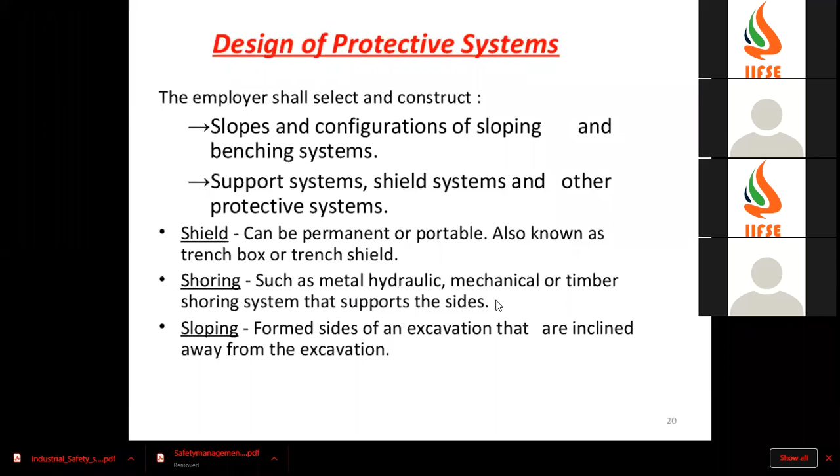Shoring - I'll show you in future slides. Shoring and sloping. Shoring is a metal shoring such as metal, hydraulic, mechanical, or timber shoring systems that supports the sides. We discussed earlier that there will be adjacent sides with wood supported by either mechanical or hydraulic systems. We've seen hydraulic pneumatic systems - the absorbers will increase or decrease based on the excavation width.

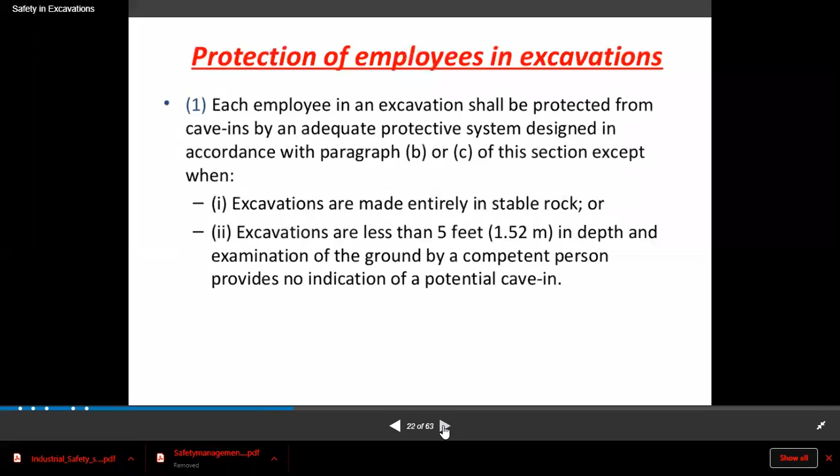So sloping - form sides of excavation that are inclined away from the excavation. Inclined means sloping, and there is also benching. There is a slope which is inclined 45 degrees away from the excavation. This is a simple side.

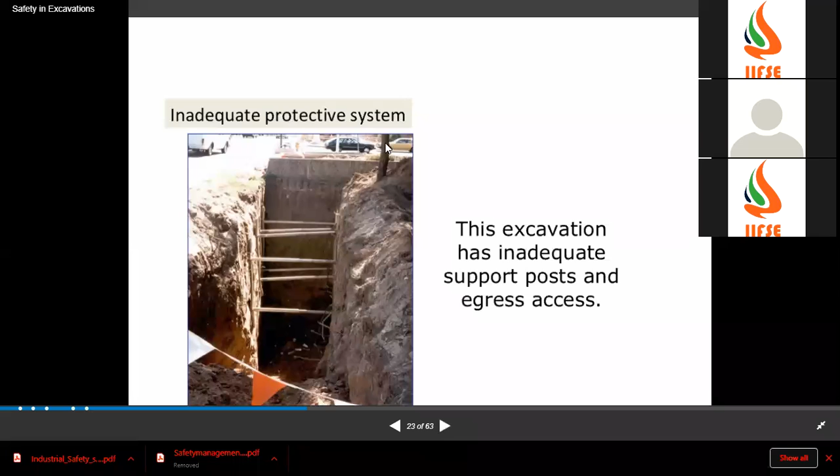Just a minute. I would like to have a look at real-time pictures. This is an inadequate protection system. See, the excavation is not proper, the protection system is not proper. And you can see one tree adjacent to the excavation part - it can fall also. This is how an inadequate protection system looks.

They don't have ladders. If you place a ladder on the excavation part, it should project 3 feet or 1 meter high from the edge - that is the standard. The worker also, in the trench, they have dumped excavated soil nearby this - that is also a very dangerous scenario, an overburden condition. It's a very unsafe and dangerous condition, right?

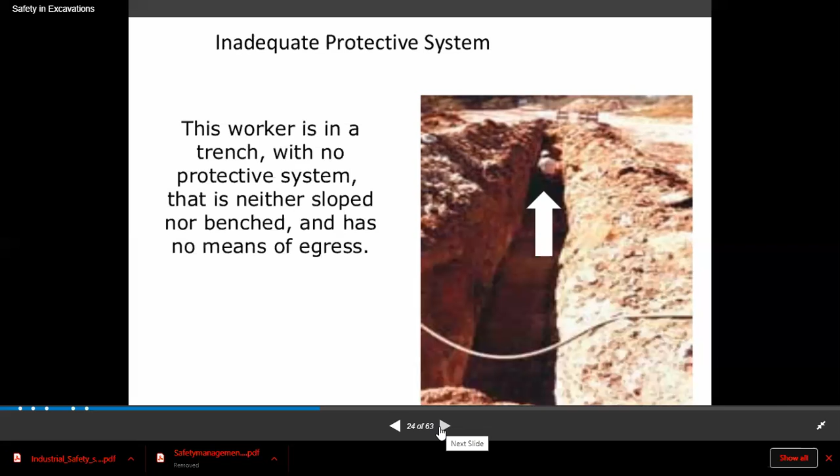The soil should not be placed adjacent to the excavated area. There is no shoring, there is nothing, no protective system - either sloping, shoring, or benching. So what is this?

We are talking about soil classification, factors - this is an important slide. What are the factors involved in designing a protective system?

What are the factors it depends on? If we need to design a protective system to protect an excavation and take safety precautions, on what circumstances does it depend? What factors are based on - if you want to choose shoring, benching or something, on what basis will you choose that?

It depends upon the soil classification - Type A, type B, type C soils will be there. It depends upon soil classification, and the depth of the cut - how deep it is. If the depth of the cut is too deep, they'll place more trench boxes, or if the depth of the cut is too deep, they'll use shoring techniques.

Water content of the soil - why water content of the soil? It determines the stability of the soil. What happens if the water content is more or less? If the water content is less, the soil will be loose. Why does sliding happen? Landslides - when the water content of the soil is more, the slides happen.

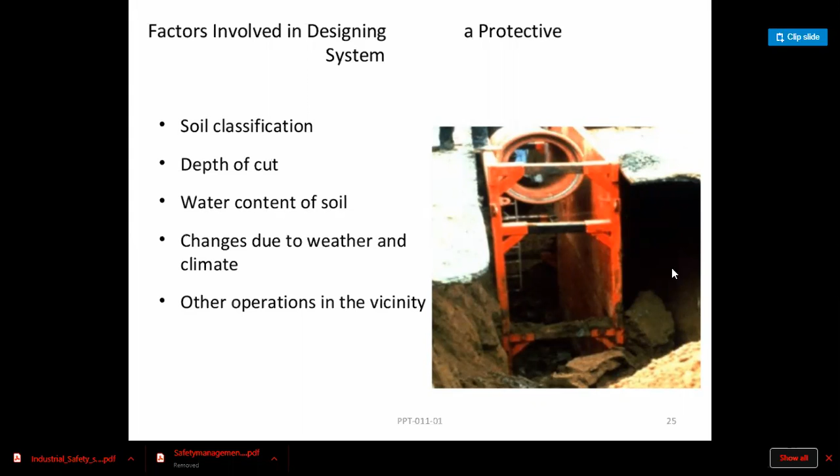First thing is sloping - just forming a slope beside the adjacent sides. Shoring means keeping wooden boxes or sheets and supporting those sheets with different kinds of means - it can be wooden, hydraulic, or mechanical.

Shielding means a trench box. Use walls, cross braces, and uprights. Supported excavation walls must account for soil type and width of the excavation.

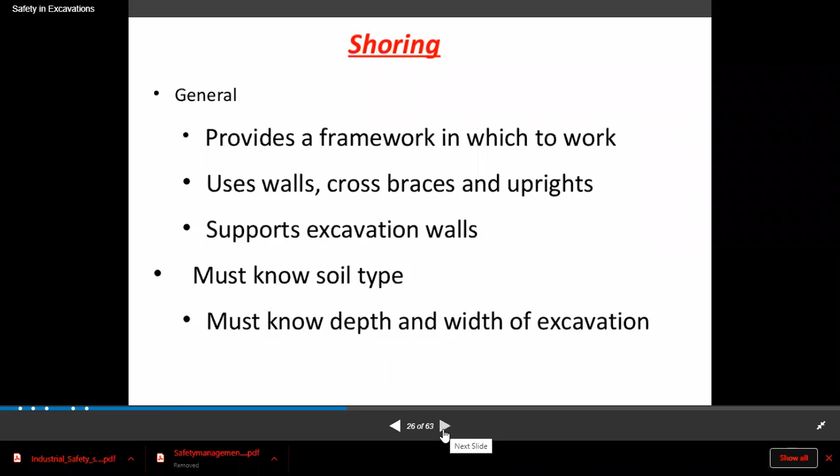So this is the trench box - the shield. What is he doing? There are pipes running, and he is working in between the pipes.

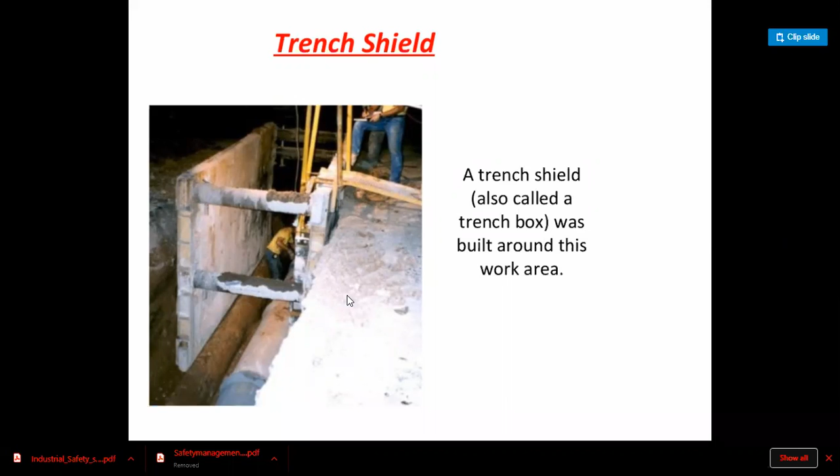Access and egress also should be considered. Always when a person is going into a trench, access and egress should be proper. Here he doesn't have proper access and egress - well, he has something to catch here, right? So the ladder should be extended further, or this kind of provision should be provided.

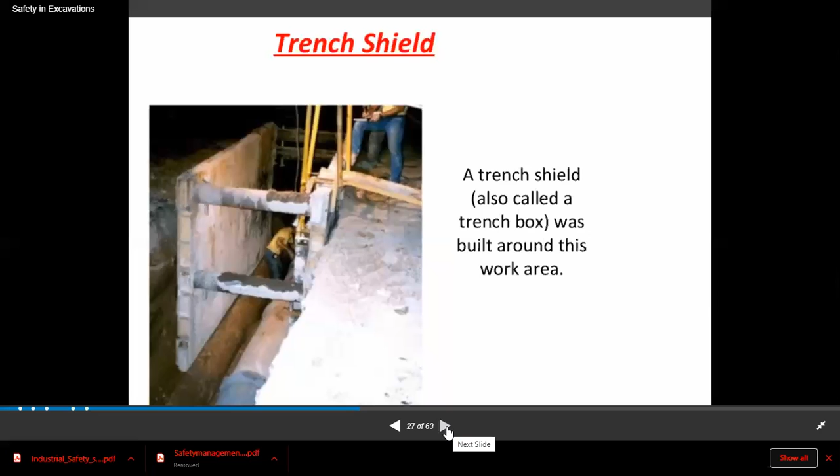It has a provision of grip. Normally the ladder should be 3 feet or 1 meter high from the edge. See, this is hydraulic trench support - you can see it very clearly. These are the hydraulics, this pipe is the hydraulic pipe in which he can adjust the trench support.

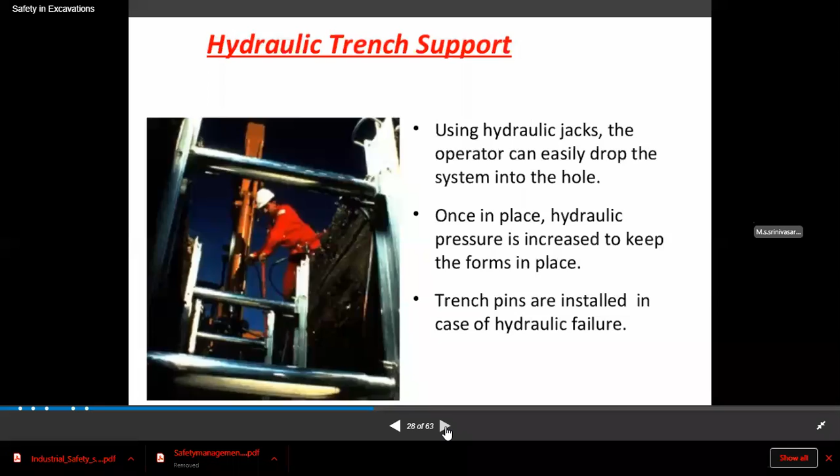The person who is overreaching also is having proper PPE. This is a trench box, but it is used appropriately. Materials and equipment - see, this is what happens if there are no barricades.

So if you have a question like, in what way do you protect vehicles from excavation areas - how will you protect the vehicles? You will install barricades, hand mechanical signals, and stop logs.

Stop logs are something like caution boards - yes, caution boards come under caution boards, signage boards, informative boards, caution boards, and safety boards. Normally, as per our government standards, information boards will be square type and blue color. Traffic boards will be red color, and there are some other colors.

Stop logs means you have to keep one wooden cubicle form. It indicates yellow and black, right? Signage boards indicate - what, sir? Signage boards contain two colors, that is yellow and black.

So there are three types of boards - informative, cautionary, and signage. Different types of boards, and if you're on the road, you can see the colors - some boards will be blue, some boards will be yellow.

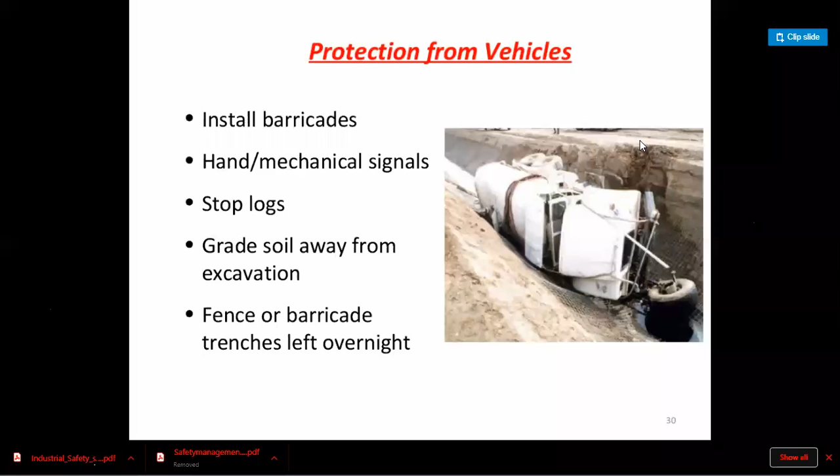Grade soil away from the excavation. If you are grading soil away from the excavation, what happens? The distance at which the vehicle moves will be away from the excavated areas. This is a very serious accident that happened in which you can see the tire has come out completely.

Fence or barricade trenches overnight. Okay, see what happens here. What is the very dangerous thing going on? The weight and vibration of the crane makes this a very hazardous condition. Even though it is a rock, it is still very necessary for a person to have shoring or benching techniques.

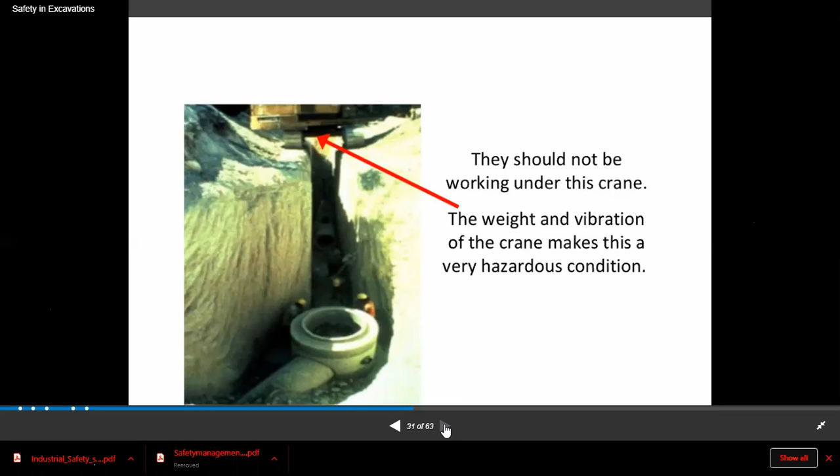Here in this type, they cannot insert the trench box. Sometimes they'll have shoring techniques. Okay, this is a very hazardous condition. This should not be encouraged.

And in case of spoil piles, do not place spoils within 2 feet from the edge of the excavation. See, here he mentioned 2 feet. Spoils means the debris which we excavate, the soil which we remove. Measure from the nearest part of the soil to the excavation edge, meaning edge of the excavation area.

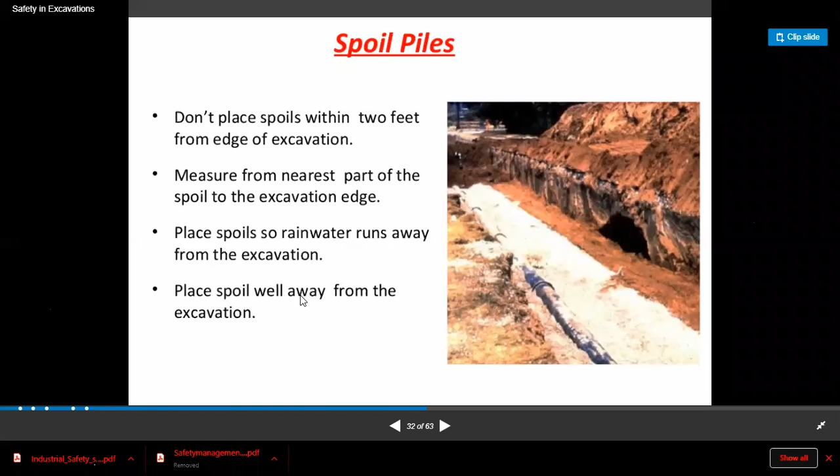Place spoils so rainwater runs away from the excavation. Place spoils well away from the excavation.

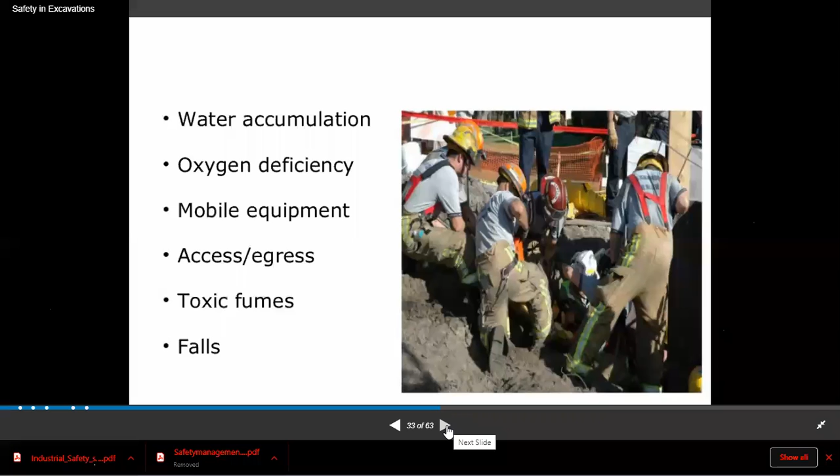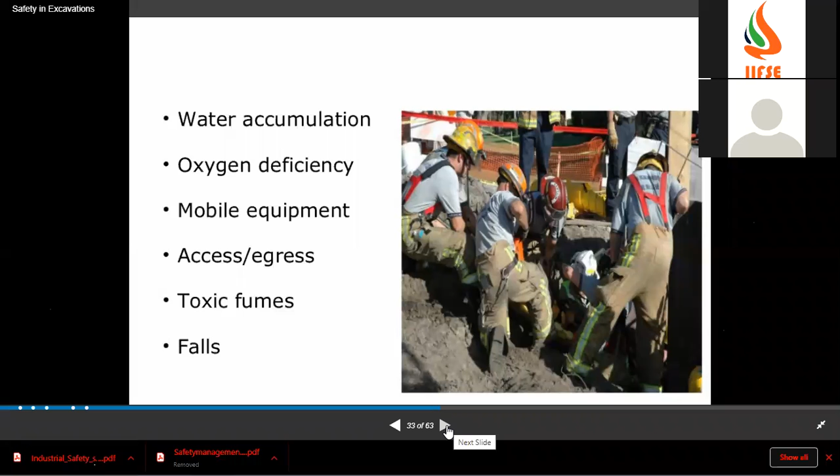So these are a few challenges faced. What are the few unsafe conditions in excavation? Water accumulation, oxygen deficiency, mobile equipment, access and egress, toxic fumes, and falls. With these points you can elaborate the sentence and write water accumulation due to rain or adjacent sewages, oxygen deficiency, mobile equipment like when it's coming adjacent to the surfaces, access and egress cannot be in a proper way, toxic fumes, and falls.

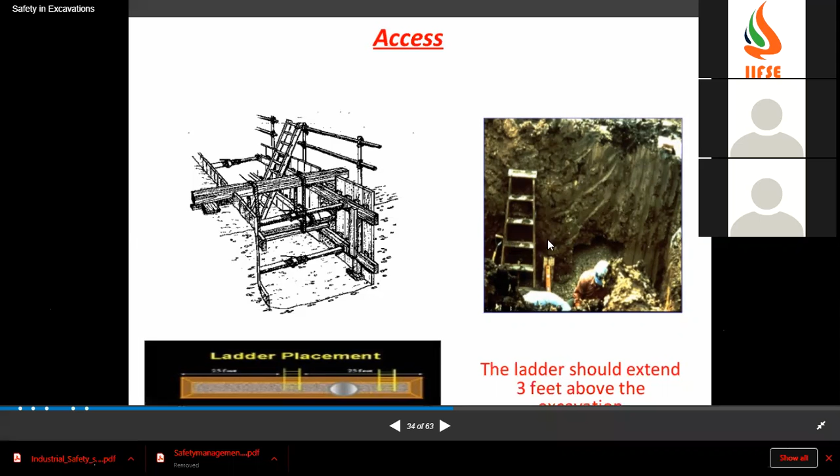See, this is an extension ladder used, but it's not used in a proper way. This is an unsafe condition. This is the requirement.

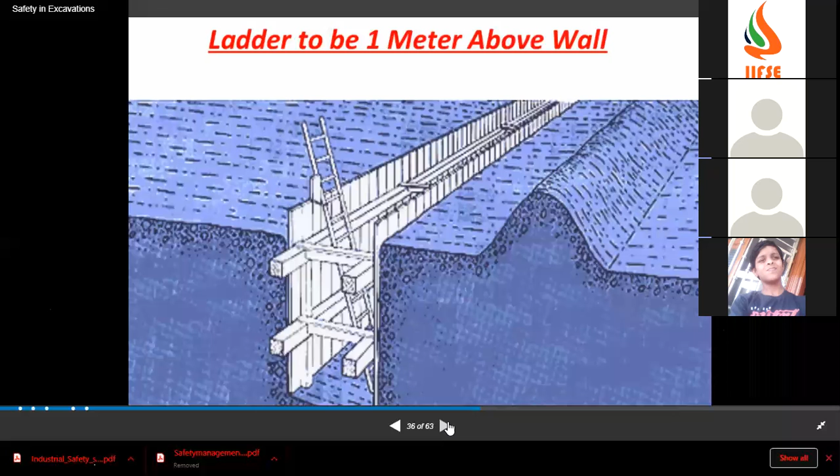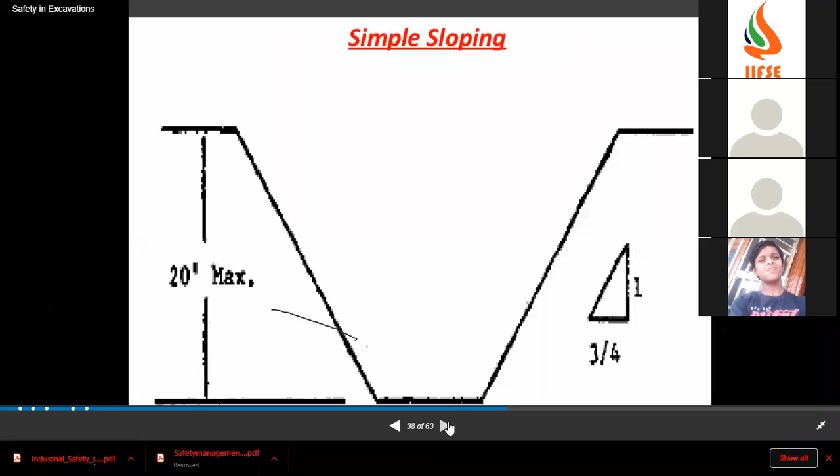There are 3 basic protections used in excavation and trenches: sloping and benching system, and shoring system. Again, the same thing, see, what is this called? Sloping, yes, good. What is this? Benching and step cutting. Benching, yes, okay.

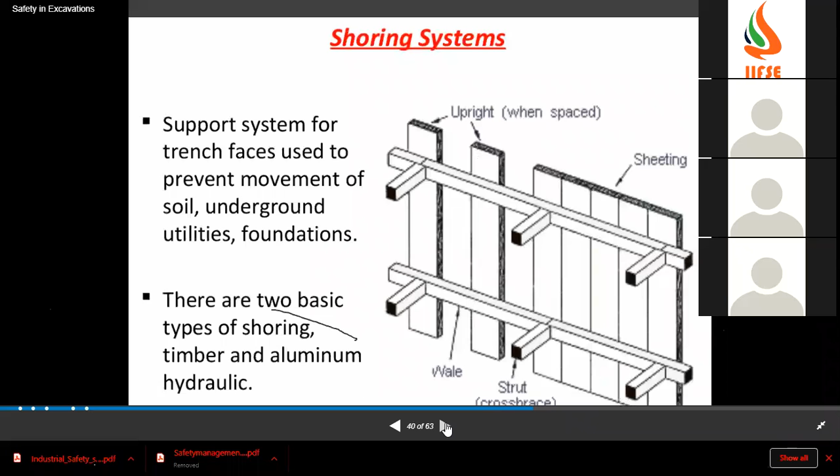What is this? Shoring system. Yes, shoring components, these are the shoring components, you can have a look at it. Screw jacks which tie the shoring component, the shoring component may differ, it can be wood, it can be sheets, anything, wale, mechanical. If they ask about shoring components, you can write hydraulic shores, pneumatic shores, screw jacks.

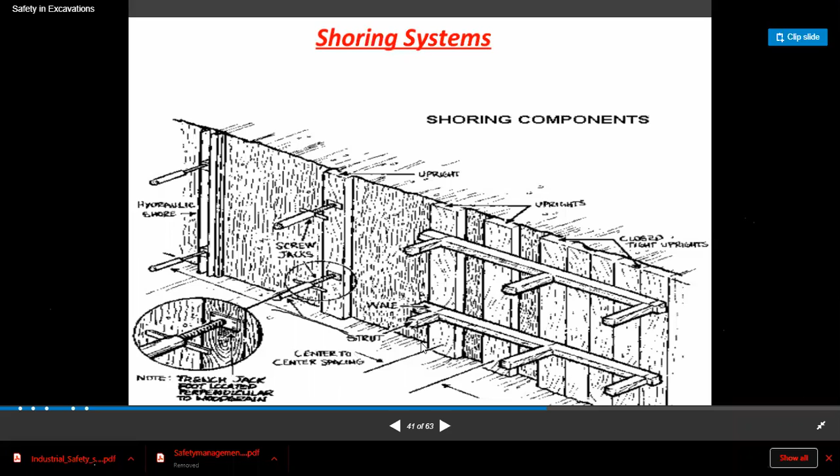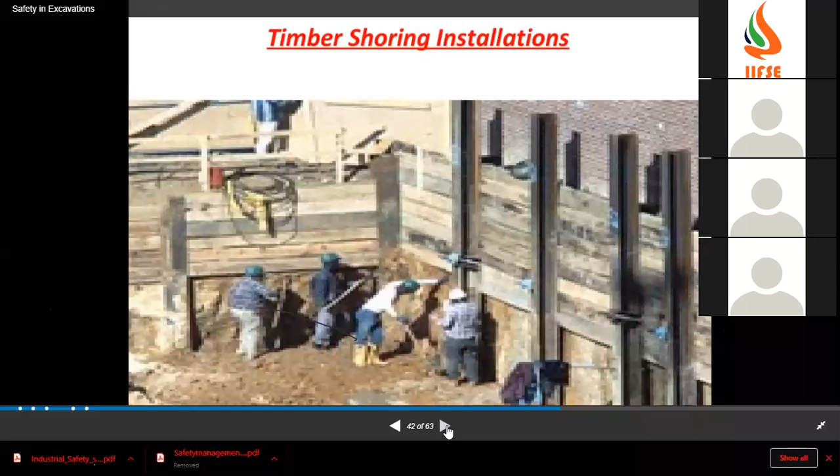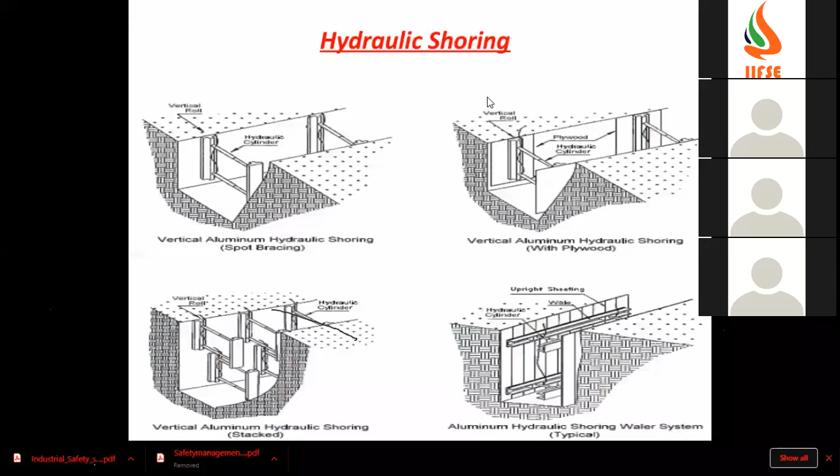Center to center spacing is also to be considered. See, this is the shoring, the picture is not clear, right? This is the heavy shoring technique. In pictorial representation you can have a good look. Vertical aluminum hydraulic shoring means the shoring material is aluminum, vertical aluminum hydraulic, the same thing. What is the difference here? Same thing, vertical roll, hydraulic cylinder is used, hydraulic plywood is used, okay, fine, same thing.

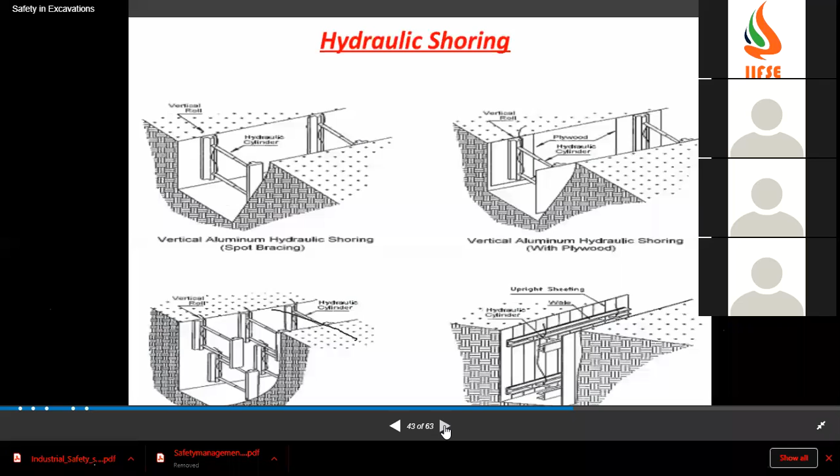See, this is the shoring mechanism, this is how you can use pneumatic hydraulic jack, screw jack.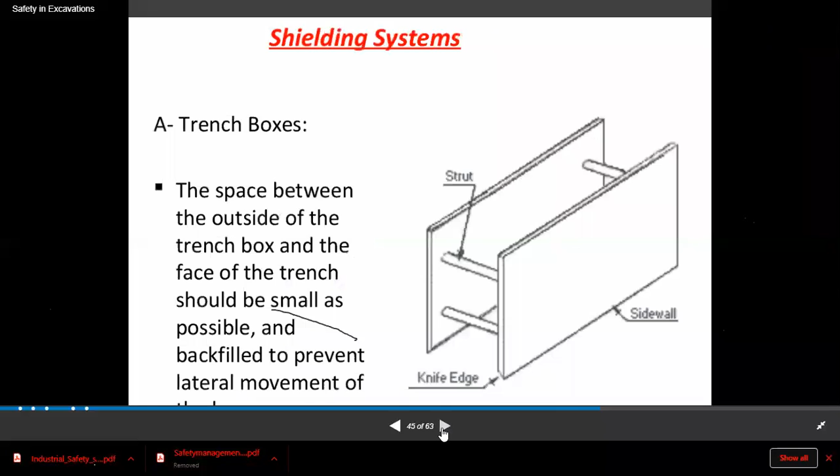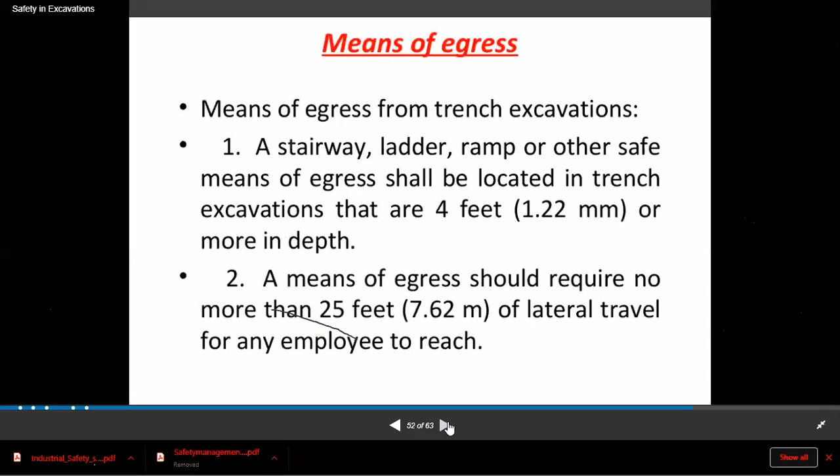See, means of egress. Once you have a look at it, I would like to show you the other presentation also. So I'm going with inspections cont..

Prior to start of work, we do fine, simple things. So if anyone asks what are the inspections to be carried out, or what are the precautions to be taken before starting the excavation or while excavating, you have to write this. So prior to the start of the work, as needed throughout the shift after every rainstorm. Fine. So he is saying that...

We should need to inspect the area prior to the start of every shift. Second thing, if after every rainstorm hazard increases, because the control measures what we have kept on the before day can change, can be affected due to the storm.

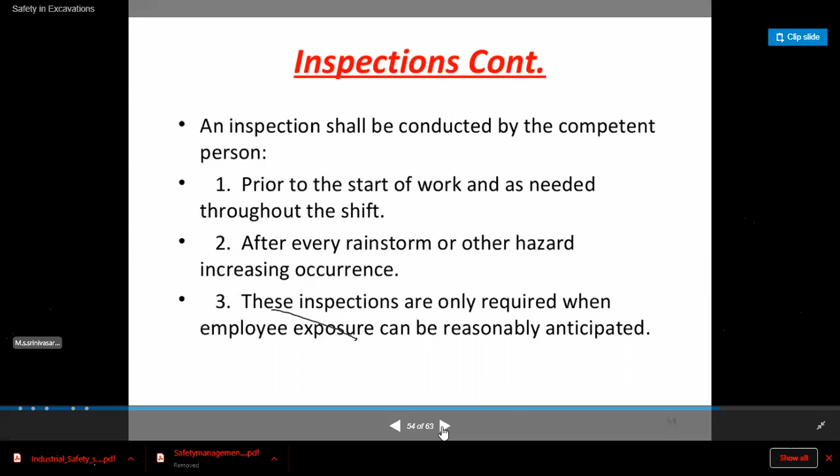These inspections are only required when employee exposure can be reasonably anticipated. When these kind of inspections are done, the protection of the employee will be increased and the others will be anticipated. These are the common things.

I just want to go to the other PPT, the same things, construction only. I'll send you both these links, and I would like people to...

No. Can you see now? Is my screen shared? The blue color screen, sir. Yes, sir, yes, yes, sir.

Yes, sir. So this is also a construction safety PPT with very nice bullet points, the best I found so far. See, here he is saying safety measures for different types of civil engineering constructions: building constructions, bridge constructions, and road constructions. So everything has its own hazards.

So what is the common hazard in everything? Working at height, and using scaffolding, right? And in construction they'll use paints, right, which are also flammable. Excavation is also common thing, sir. Bridge constructions, I just want to show a few...

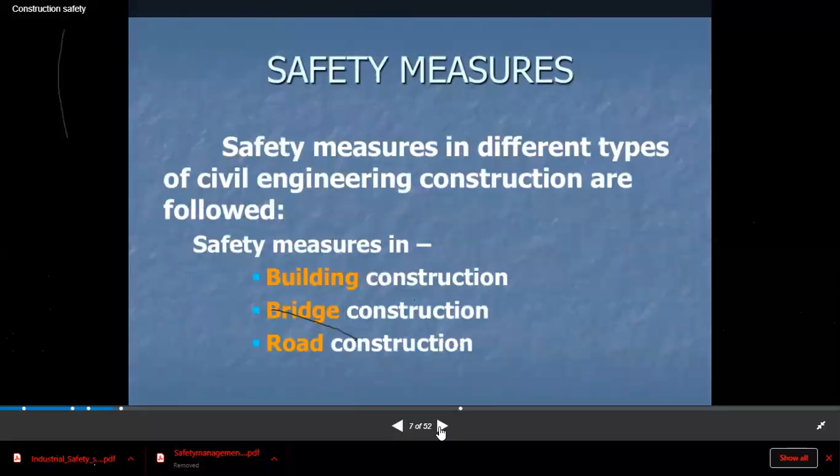Fine. So coming to the preventive measures, he is saying what are the preventive measures? Preventive means proactive. Preventive is something proactive, and there are reactive measures too. Do you know the difference between proactive and reactive? Proactive is like taking control measures before the accident. Reactive means after the accident, taken after the investigation is done.

Coming to the preventive measures: have a site safety plan. We should have a safety plan. Ensure the roof openings are not left unprotected for the building constructions.

Retractable lanyards would allow the helper to do his job while still having fall protection. Retractable means if he is going beyond the limit, it will pull him back. So there are two types of lanyards: retractable and restraint.

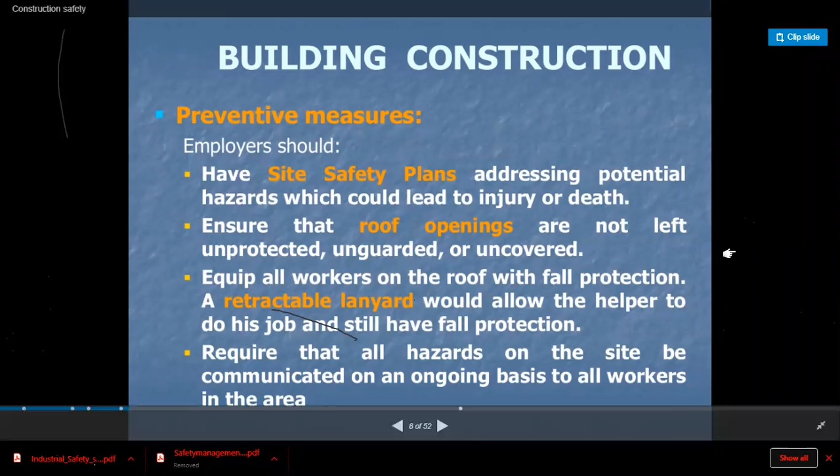It's required that all the hazards on the site be communicated, fine, through trainings. For bridge constructions, the system design should be flexible. Flexible means it should have contraction and expansion capabilities.

Platform is supported on cables fastened at equal intervals. Fastened means tied or secured, at equal intervals.

Bridge construction: platform installation, redeployment, and removal. What do you mean by platform here? Platform means the working platform, this is the working platform he is mentioning here.

Platform deployment and removal process should happen quickly with minimal traffic disruption. Installation and redeployment are opposites. Removing should be done in a proper way, quick and with minimal disruption.

That's the reason why today all platforms and scaffolding installations are customized. They keep a base, a base plate, and attach additional requirements as needed. They are all customized, not using any unconventional platforms.

Side tarps should be created with full enclosure. The bridge tarps which are adjacent to the bridges should have an enclosure.

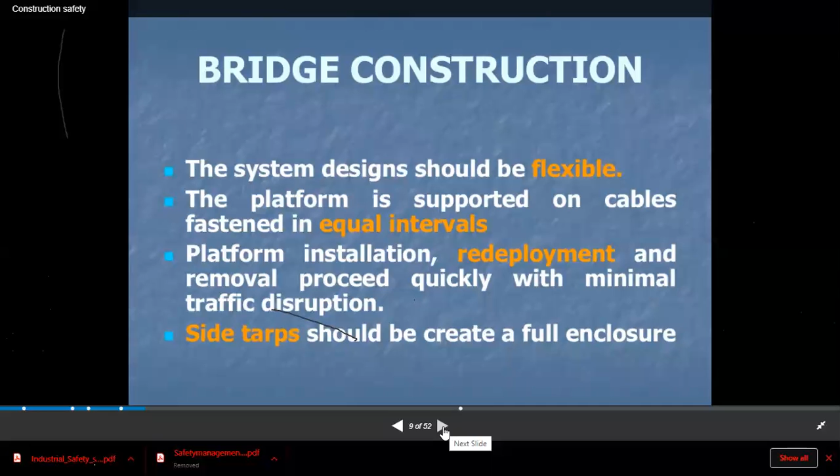Coming to road construction - one of the points in the syllabus asks about safety precautions while laying a road and while dealing with asphalt and tar, that black material. What precautions should be maintained? Normally, if you're asked such a question, just imagine you are at that site.

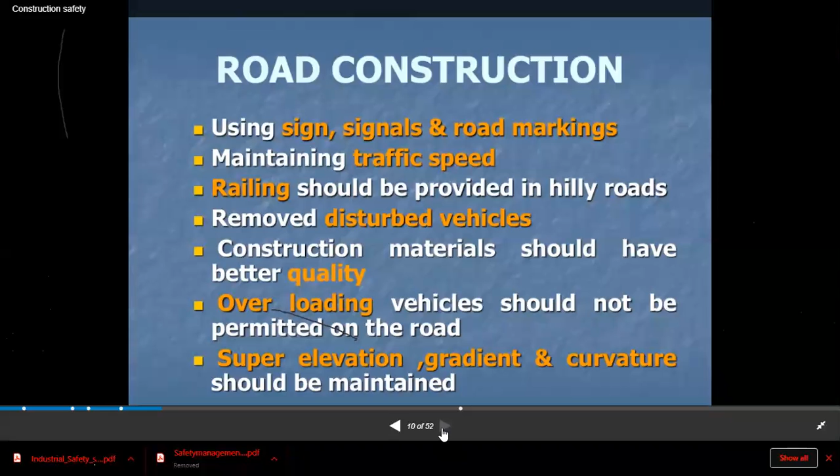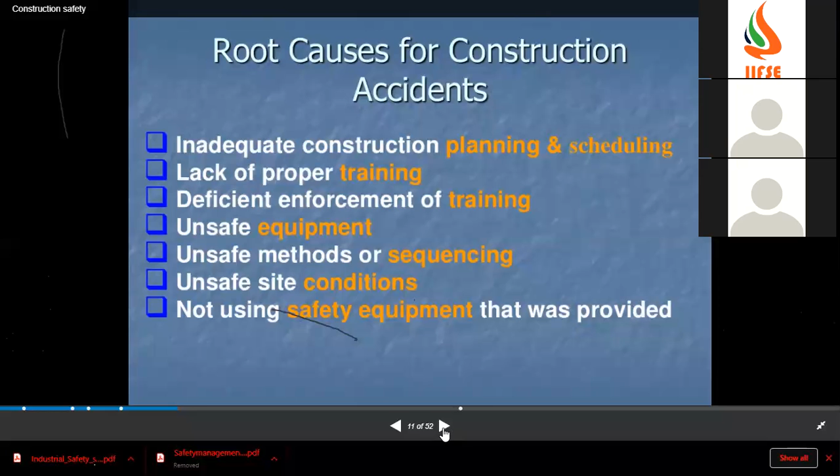Now, root causes for construction accidents: lack of proper training, inadequate construction, unsafe equipment and methods, unsafe site conditions, not using safety equipment, lack of competent persons, ineffective supervision, poor communication, absence of safety rules and safe work procedures, and lack of enforcement of safety rules and procedures.

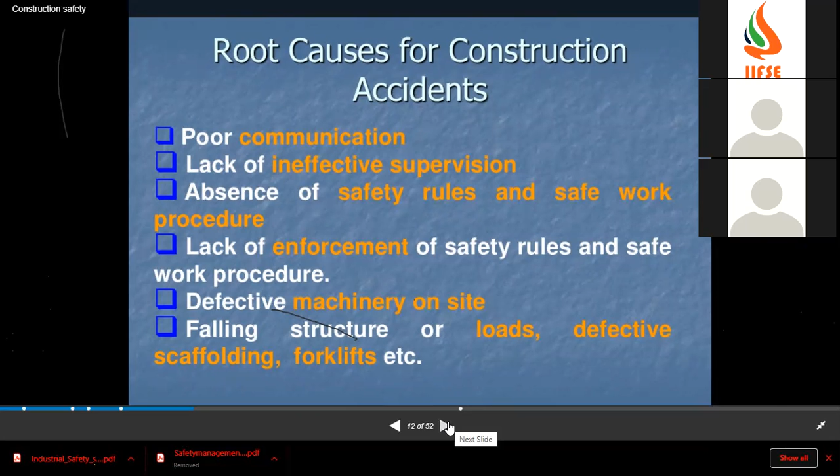All standards should be maintained. Communication is very important - if you are not able to communicate with the crane operator, he may take his own decisions. Defective machinery on site is very dangerous because it can overtip the load, cause falling structures or loads, or involve defective scaffolding or forklifts.

I'd like to show you some basic accidents. Scaffolding accidents happen when improper scaffolding is erected - if it's erected on an improper or unstable surface, without proper bracings and ledgers, scaffolding accidents may happen. This also depends on the surface.

If scaffolding is erected, there should be proper barricading for vehicles to move around. This is a common cause of scaffold accidents, because they erect the scaffold without a proper turning radius for vehicles, which then come in contact with the scaffolding base.

Welding accidents can also cause fire accidents - welding arcs can fall into flammable gases present at the construction site, or fall onto paint, which also causes fire. Then there are trench accidents, and as we saw in the previous presentation, toxic gas attacks in confined spaces.

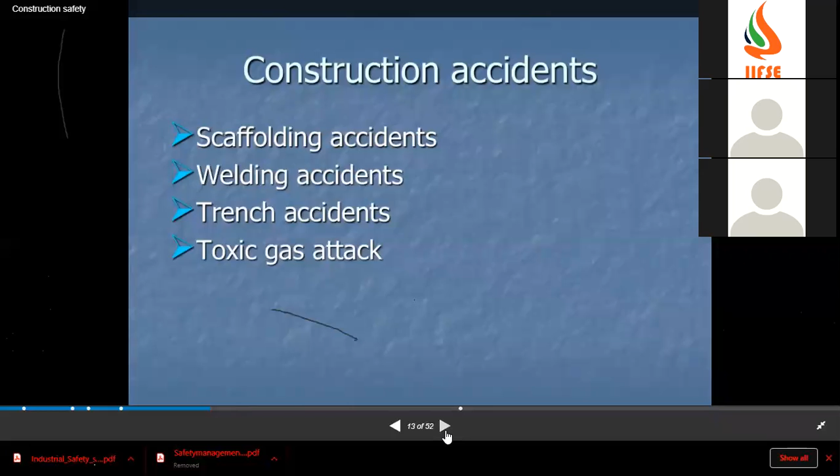See, what is the basic thing? This is all you have to remember. Construction site hazards: site falls means fall from height. Crane accidents can happen. What are the basic reasons for falling off from a construction site? Basic reasons: improper working at height without lanyard.

Unprotected edges, slippery surfaces. Lack of knowledge, improper training, lack of supervision.

And perfect. So, crane accidents. We have only 6 minutes of time. I just want to show you the entire PPT.

See, crane accidents: run-over, operating, electrical. You have a look at it. So you have construction accidents like elevator, structural failure - these are all construction accidents related to unsafe conditions or hazards.

You have to just remember these basic things. Question how crane accidents happen, how electrical accidents happen, how fire and explosion can happen - by storing paints in one room and doing welding work in the same room, or by using improper welding equipment.

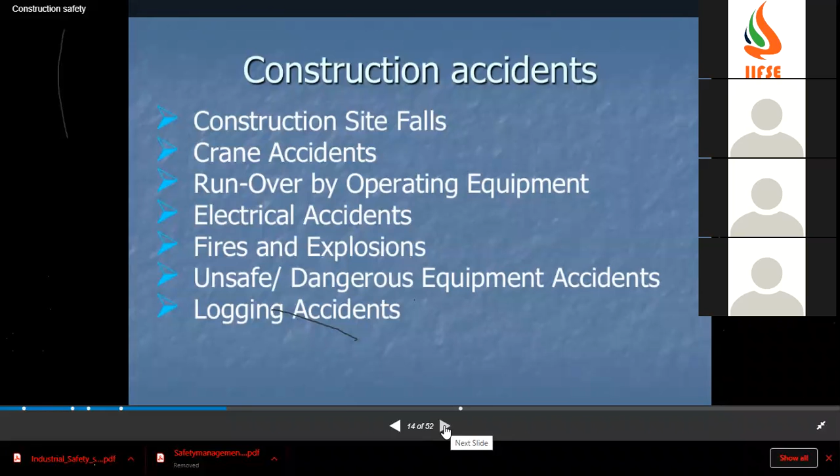Forklift, dumpster, compressor - in this slide you can see all the equipment and related reference accidents of the construction site.

Elevator accidents happen due to improper maintenance, using heavy loads, and not using safe working load.

How structural failure can happen - by improper planning, deficiency in structures. How a building can collapse: if a crane beside the building falls on it, the building may collapse. Also due to improper foundations, or constructing near loose soil.

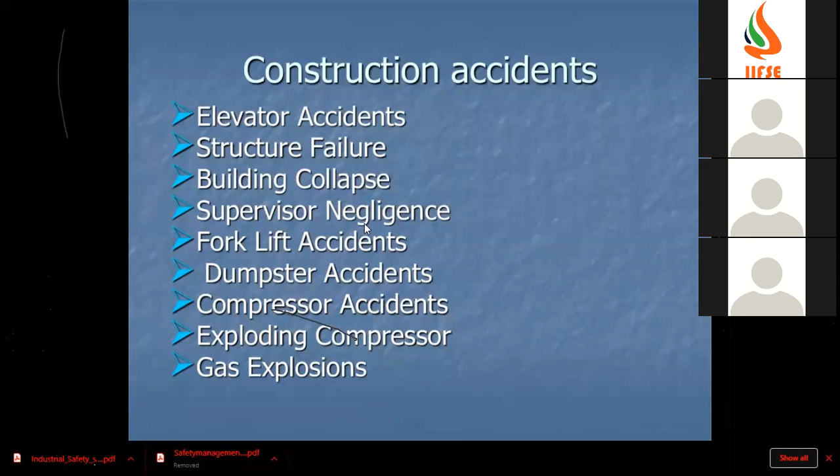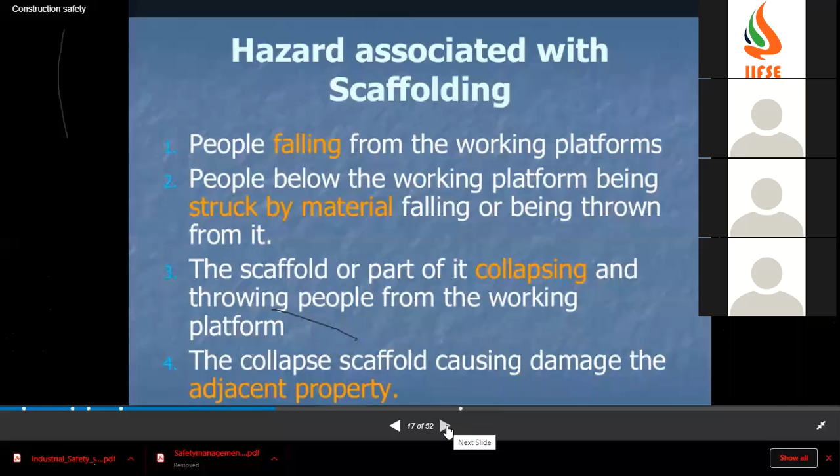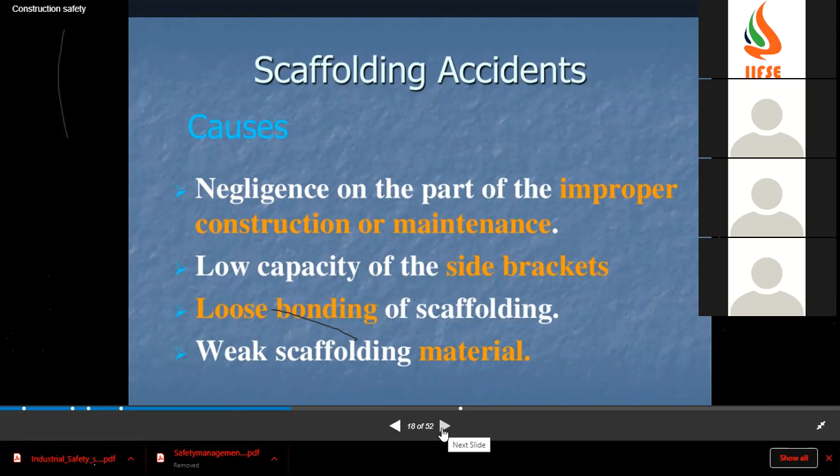What are the causes? Negligence in proper construction and maintenance, low capacity of the side brackets - I'll be explaining scaffolding parts separately in another PPT and class. Also weak scaffolding material.

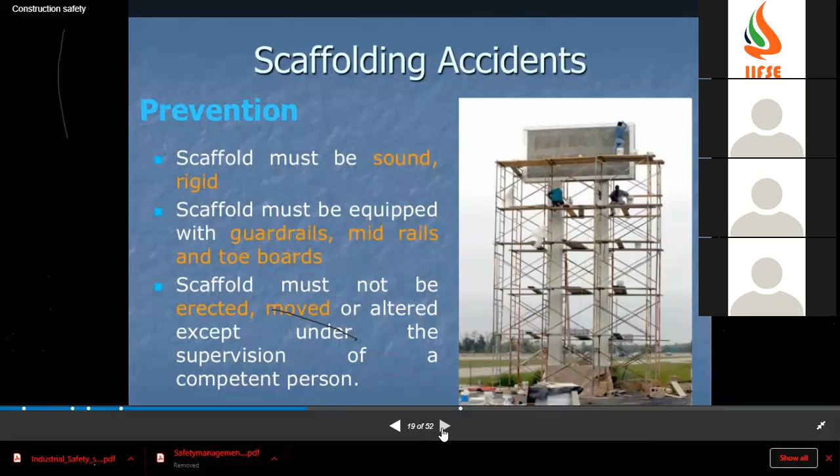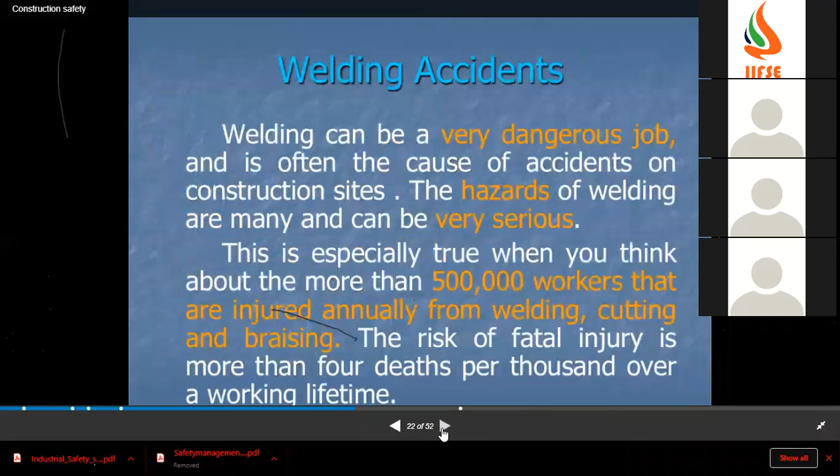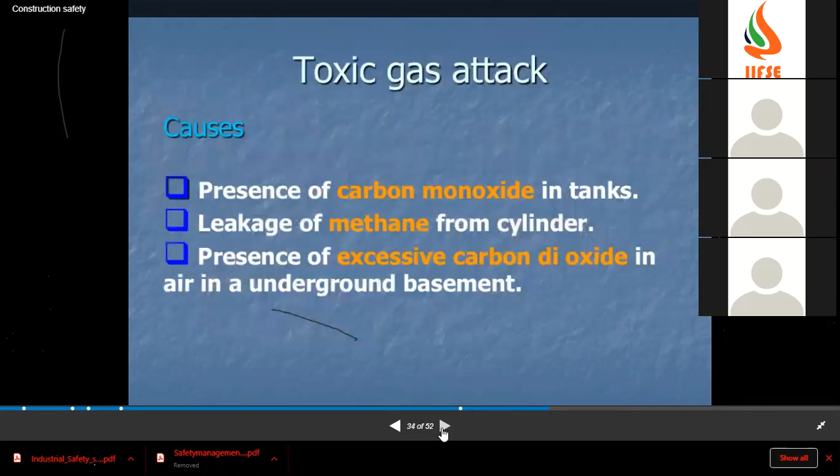Coming to the injuries part - head injury can happen when a person falls from height. Severed nerve injuries happen with continuous hammering or jackhammers. Coma if you breathe in toxic gases, cumulative trauma disorder.

Trauma disorder means heat stress which affects your central nervous system - spinal cord injuries, paralysis, death. These are common types of injuries.

Burn injuries - we have seen different kinds of hazards and how construction affects the human body in this way. These are the common injuries.

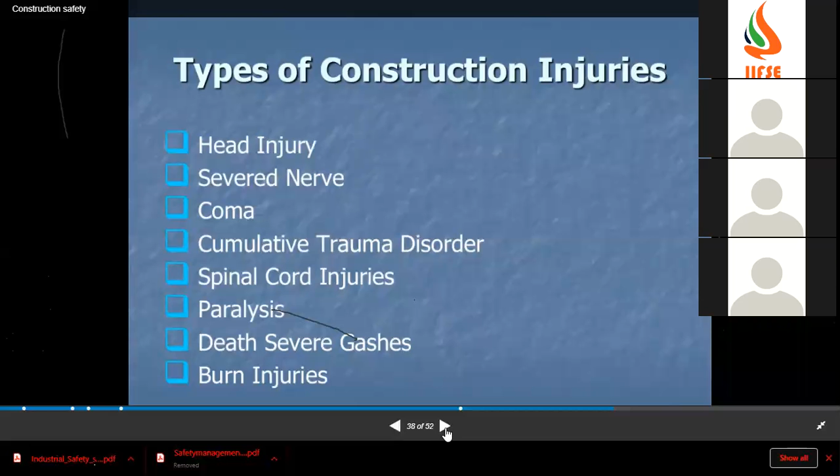Next class I'll discuss prevention of accidents, FMEA (Failure Mode and Effects Analysis), or HAZOP analysis. I'll show you a case study on prevention of accidents next class, and we'll also discuss the Employee State Insurance Act.

Right, any doubts in the class? Everything is fine, right? One more minute. The class is understandable, right?

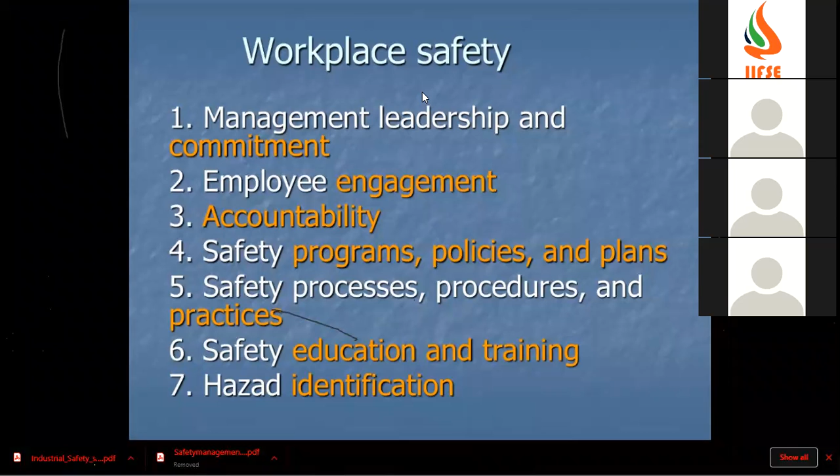Are you still there, people? You've got an idea of what is what, right?